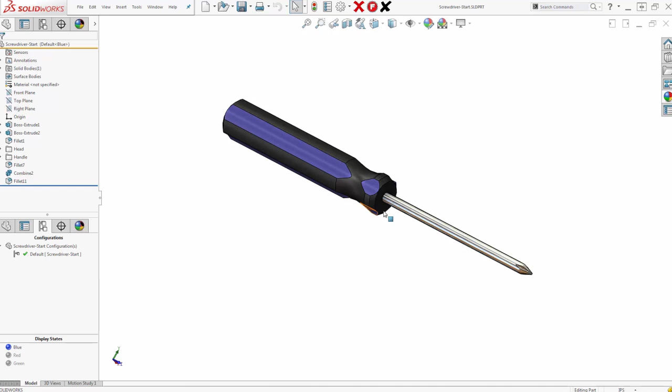If we want to start by changing this into a small or a medium screwdriver, that's easy. Let's go ahead and just double click on our shaft length here, and you can also turn on the dimension names. So let's go ahead and show how to turn that on. If I click on the eyeball and click on this particular button here, view dimension names, it shows those names. These can be created or set by clicking in this particular box on the modify dimension dialog box.

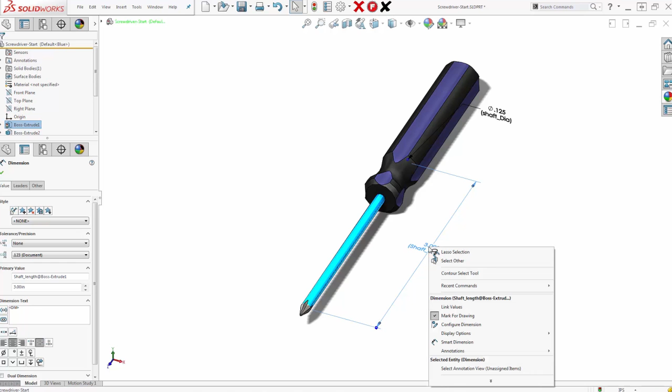Let's go ahead and change this to create a couple of different configurations. We can just right click on this dimension and go to configure dimension. It brings up a little box where we can type in what configurations we want. So let's say we want a large. That's going to be a dimension of 3. So we can just go ahead and now click in the next one. Medium, that's going to be 2.5. And then the last one, a small one, going to be 2. And then we can also create that stub, which could be 1.25.

We also may want to configure this a little bit different as well. So instead of just having the shaft length included there, maybe we want the handle included as well. We can go ahead and add that just by double clicking on our dimension. And you can see it adds in this column. I also added in that revolve. I'm going to go ahead and right click and just remove that column from our design.

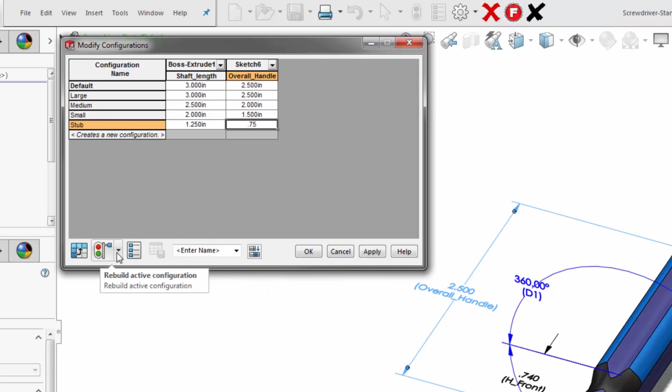Now what we can do is go ahead and update this. So our large, our medium, which is going to be 2, and our small, which will be 1.5, and then the stub, which will be 0.75. We can also go ahead and rebuild all of the configurations by clicking on this button right here, and that will show us that they've all been rebuilt with that little green check there.

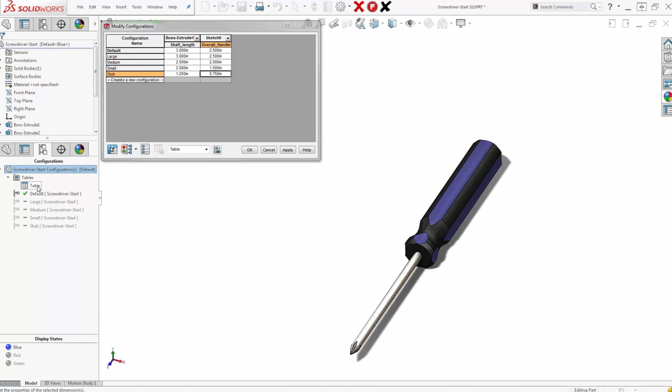We can give this a name, and in order to come back to this particular table layout, we just have to give it a name and click on this button right here to save that table view. In fact, you can see here on the configuration manager, it adds that table into our list. Let's go ahead and click OK. See what we have. So now you can see we do have a large, we have a medium, we have a small, and we have a stub.

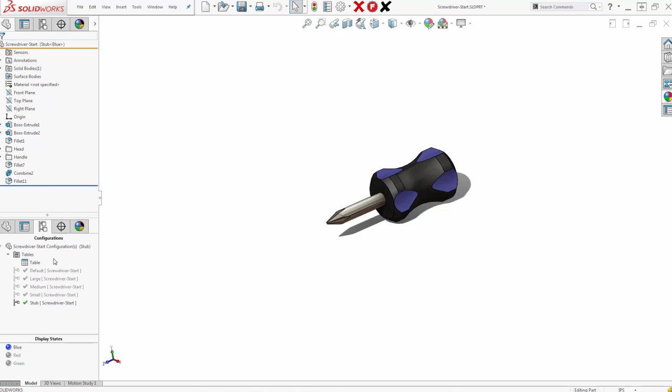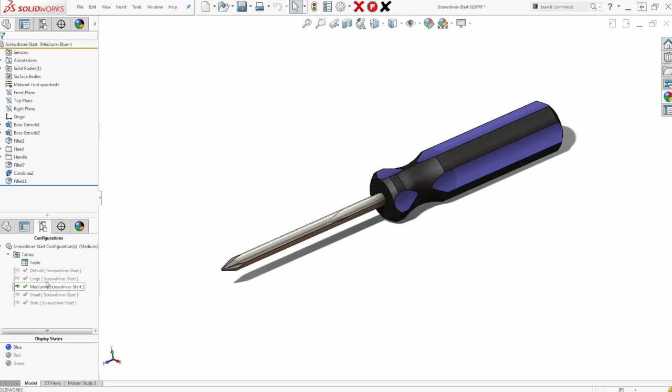Maybe for the stub we actually want to change this and remove our cut revolve here. Well, that's easy. We can go ahead and double click on table. We can double click on this, and then we can remove that by just suppressing it from this table. We can go ahead and update our table to include that column, and you can see it rebuilds that, and we can click OK, and now we have our small with the revolve, the medium, the large, and the stub.

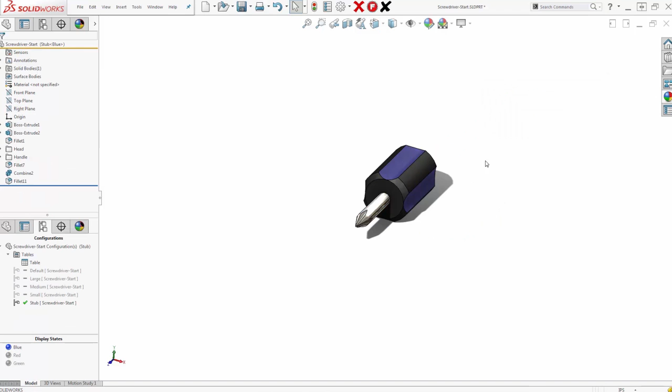Now if we want to make a change, one of the benefits, maybe we want to change the shaft size, we can make that change, and that can be applied to all of the configurations. So maybe this is 0.13, and we can rebuild that, and that will be 0.13 no matter what configuration you go to.